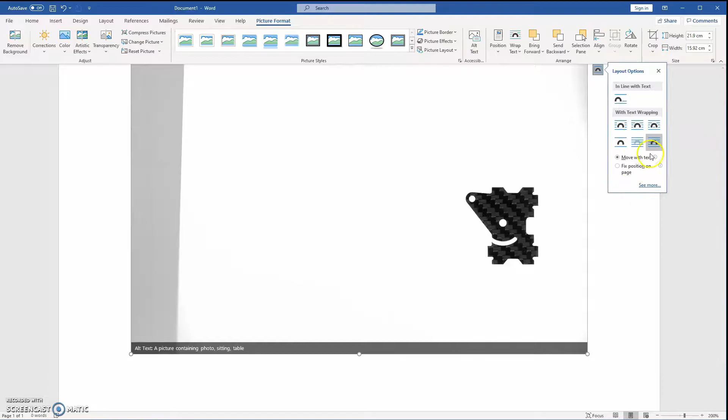So here we go, there's our frame part. Now the first thing we're going to do is make it so we can float it over the top of everything, and that's done. So now we right click and say crop. Bring that in, and we just need it to have a small border around it. The border is going to get lost in the grand scheme of things as we go forward, but for what it's worth, just keep it clean and simple and reduce the file size.

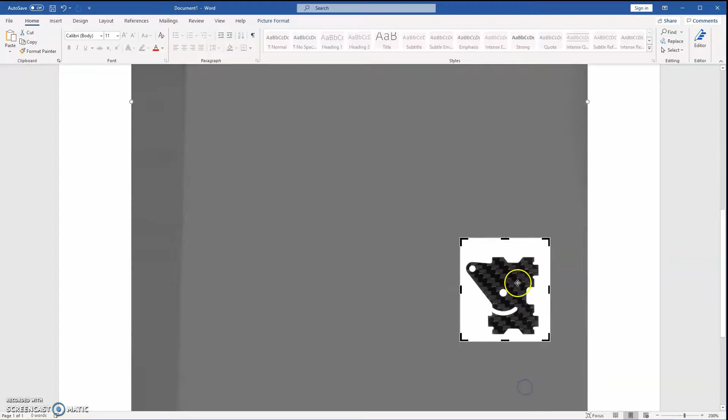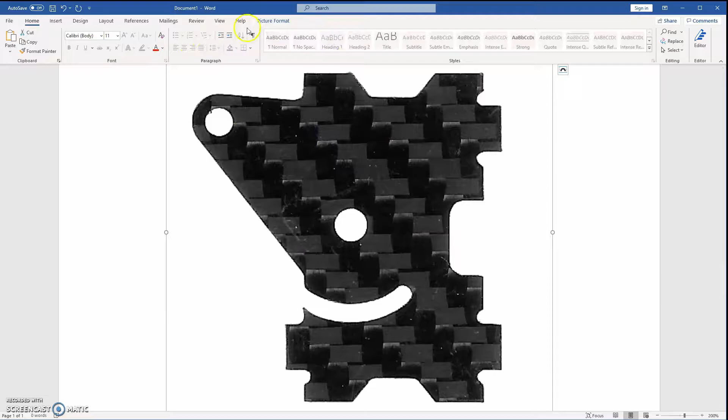Once we've done that and clicked off it, somewhere down here we have the object. Now make it as big as possible to fit the screen. You can see the pixelation, so that's great because that means you really can't get much better than that. Now we're going to go to image tools, picture format, and we're going to colour, and go black and white. Now this is where we need it to be. It saved you ages of work recolouring it. It's done it all for you.

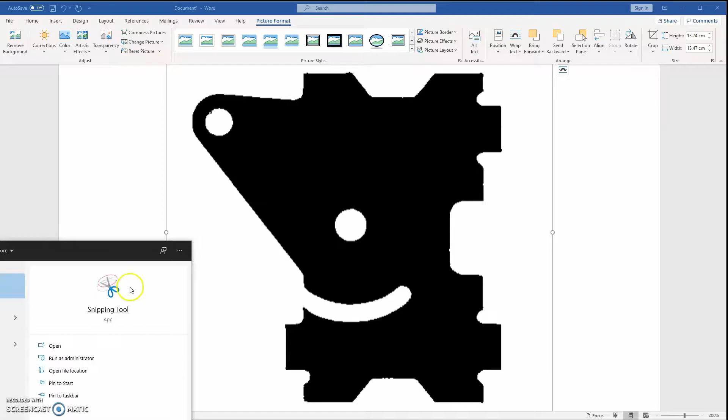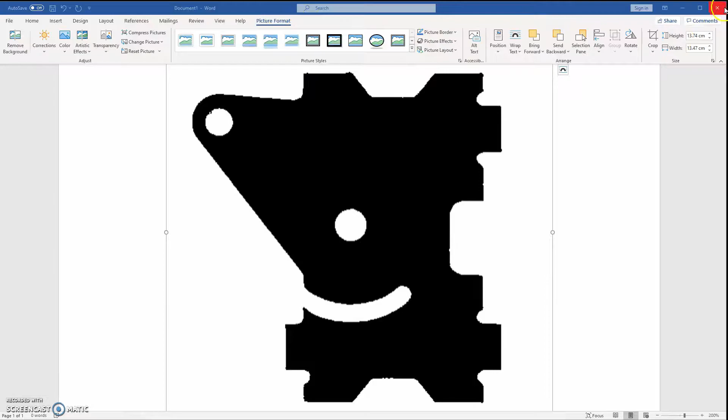Now what we're going to do is go into the Windows search bottom left and type snip. We're going to go to the snipping tool and take a nice simple little snip of that so we can snatch the entire object. Okay, now we say snip, and we're just going to call it capture. It's already done it, so that's done. We now close out of the snipping tool, close out of Word, save, and we're back to our main screen.

Now we're going to open a web browser and find an online repository. This is the particular one I use, it's called Convertio, and you're going to look for converting the image to an SVG, which is scalable vector graphic. Now that we've got that, we choose the file we want to import, and if we go to desktop, there is our capture. So let's just say open, and once we open it we say convert. Now it's going to take a few moments to convert that to an SVG, and once it's done that it's going to give me the option to download it. So we're going to download it.

So just talk amongst yourselves for a moment. Usually it's quicker if you can convert it to a bitmap. This does take a lot longer, but it will work fine with JPEG. Then quite simply what we do is click on the download button, and it's going to be called Capture SVG in this instance.

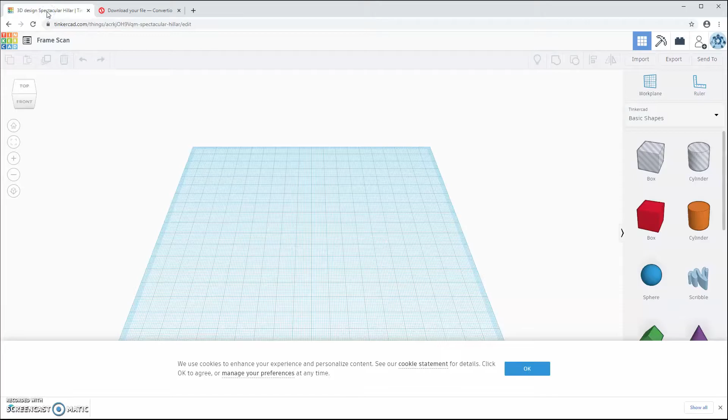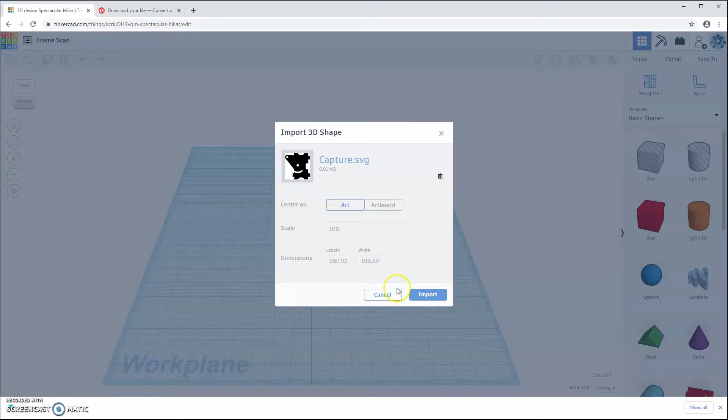So now what we do is go to our CAD program. I use Tinkercad, I find it a great way to do everything I need to do, and all we're going to do is say import. It says choose file, and this time we go to our downloads and go to capture, and open capture. Now it's going to ask do you want to download it as an art or an artboard? I always choose art because it trims it, you're going to lose it anyway, but we say import. Now the scaling size it gave you there, if you struggle to get it into import on larger files, you can adjust it. Now whoa, look at this, we have got it.

Now what we're going to do is simply put some sizes in. The best way to do this, in actual fact, is to put a ruler in, and it's going to tell me what everything is. Now, in this particular instance, the overall size of the item is 35.5 in length.

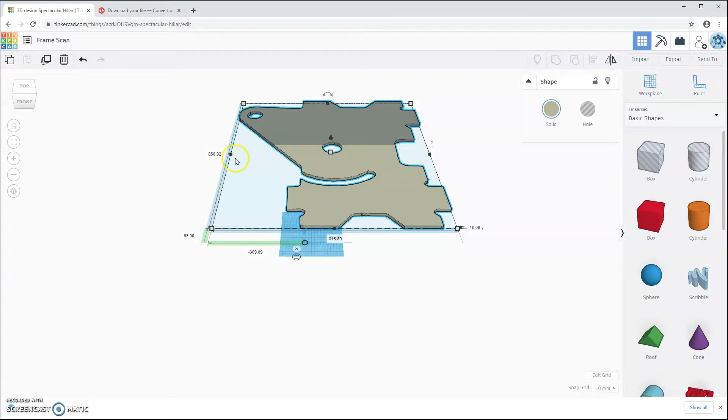If it wants to work... there we go. And the overall height is 34.37.

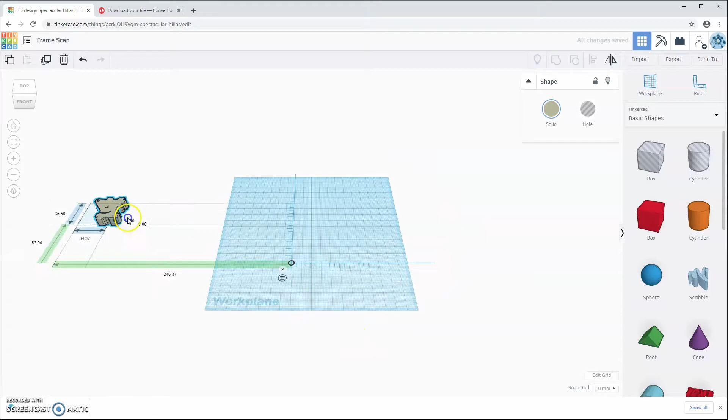Let's just scroll back in. Now what we're going to do, I think this is about 1.8... 1.62. So we've got a depth of 1.62. There we go. Our frame part is in CAD.

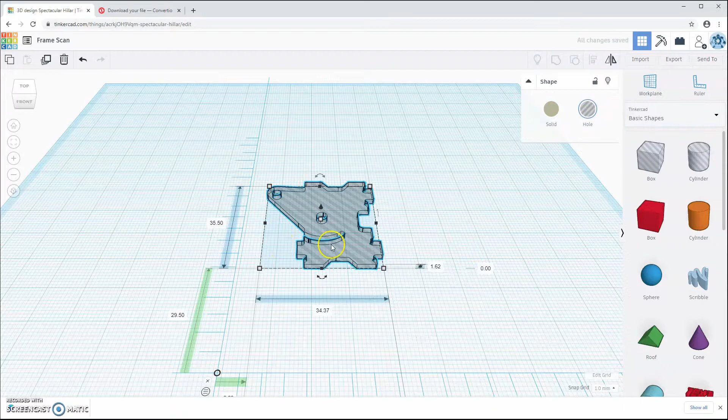Now, in Tinkercad, I can send that into a transparency if I want to, or I can make it a solid. So it's there, it's ready to go. Now you can use that in your various CAD files, and instead of spending ages trying to shape up your product, you've now got your part scanned in to the PC.

You've now got it into CAD. So how can you use it in CAD? Let me show you some little tips in Tinkercad that will make life really, really simple for you, so you can make these parts and print them off for yourself.

Okay, we're going to move back to Tinkercad. So we reopen Tinkercad. You can see the design that we've imported as well as some of the parts that I've made. Now, if we take a look here, I've scanned the arm. Now, these are both to an X220H V-frame.

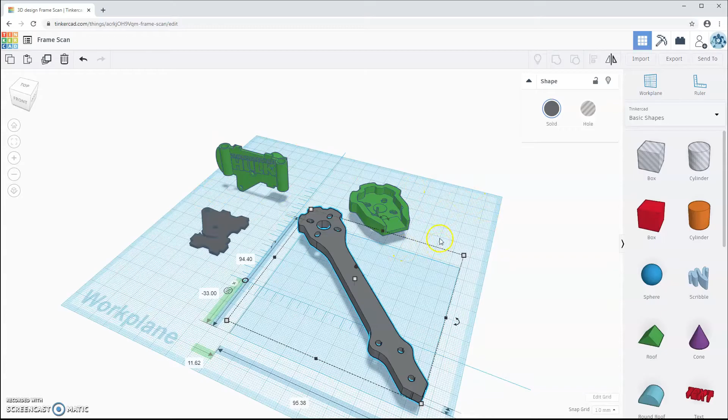And funnily enough, I'm working on a little build for the channel called the Hulk. Now, it's going to be green. It's going to be a heavyweight thing, but that's coming, and I'll show you that in another episode. But how do you use the parts?

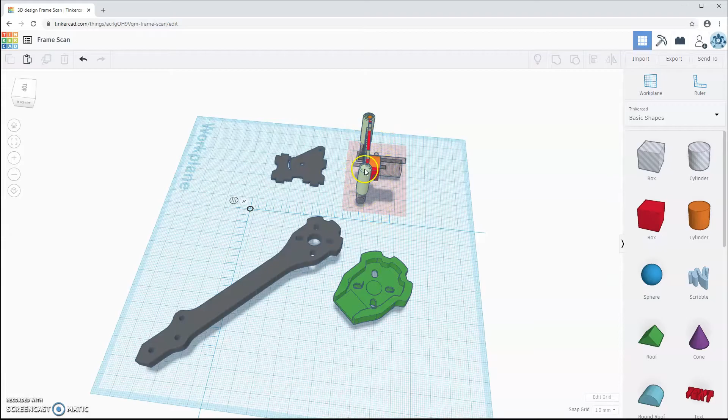Well, if we take a look at the part that we've scanned in, if I just double click on the part that I've made, you can see the various items it's made. So we've got the buzzer holder at the back. You can see the part that we've scanned in, but then we've also got the standoff sections as well, because this slides over the standoff and then enables a camera support on the side, as well as a camera protector that's bolted to the bottom.

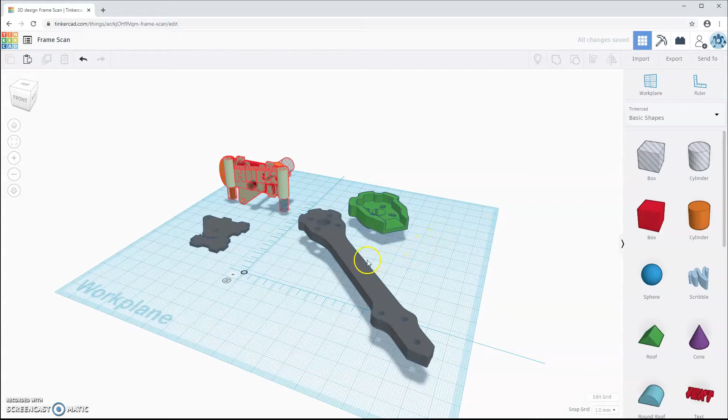So that works really, really well. And the same here with our arm. Now, if we take a look at our foot here, if I double click on that, you can see all the hollows that I've put into that in this particular instance. But just to simplify that and show you what we can actually do, if we pick up the arm that I've got, first thing we've got is here.

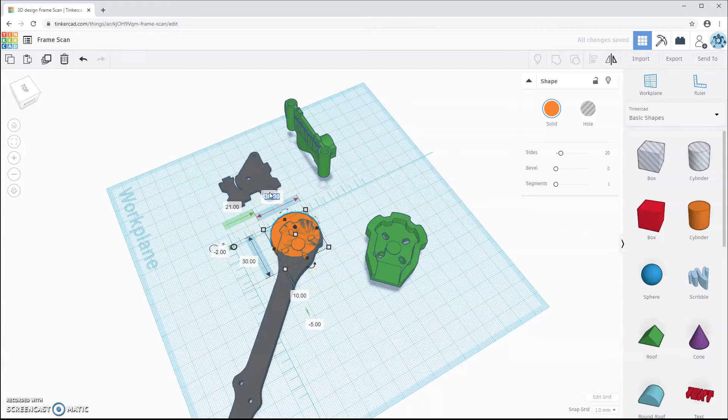So we'll set that to 0. And then let's drag a cylinder in, and we'll make that cylinder 30 by 30, and we'll make it -5 deep, and let's just set the overall height to 10. So we've got that, so let's make it 40 by 40. Okay, so we've got our 40 by 40 component.

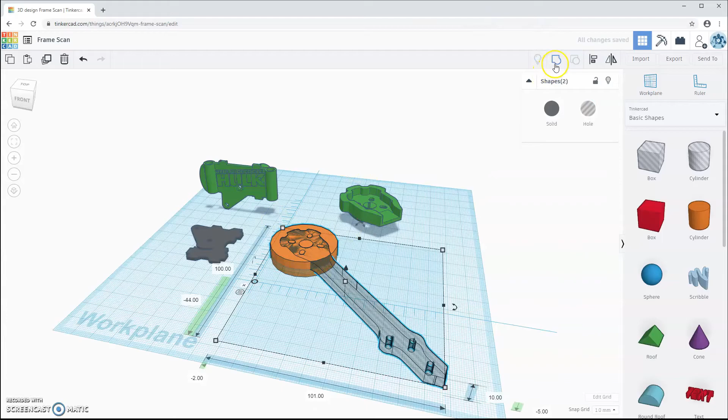Now, just to show you how you can use that in Tinkercad, click on the component that you want to make as a cutout and make it a hole by clicking on the button here. Once you've done that, simply highlight the two parts by dragging your mouse across, and then click on the group button up here. By clicking on that, that cuts the part out. As we can see here, that part's been cleaned up quite considerably, but that's all you need to do. And then you can use that, and do variants of it, etc. But that will give you, within reason, a perfect fit to your frame.

Now, a little tip: when you come to print this, don't forget to print it slightly oversized. I normally go 0.5 of a millimeter bigger on my build, so you can either do that directly on the sizes by increasing the sizes by 0.5, or when you bring it into something like Cura, then you can increase the percentage of your print. You will have to do a few trials, but that gives some really good results.

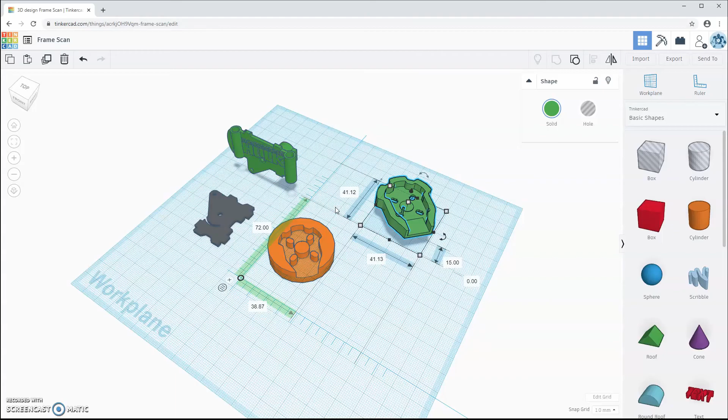And yeah, that's how you use your parts in Tinkercad. So hope that's been helpful.